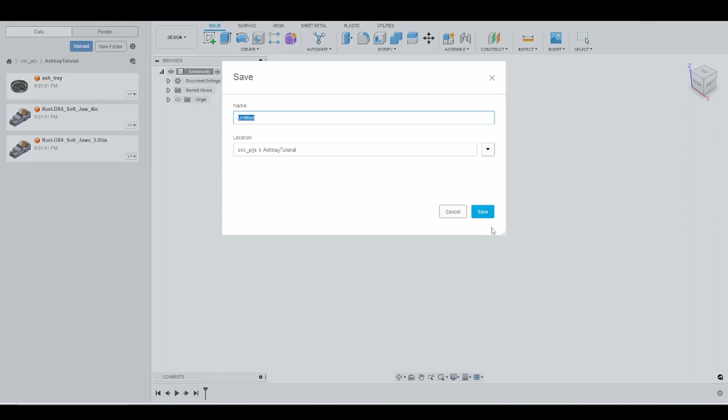Alright, the last step that we need to take before we get into the creation of the ashtray cam itself is go ahead and set up our assembly. So I'm here at a blank sketch. I'm going to Control S for save, and then we are going to save our assembly.

The next thing that I'm going to do is go ahead and drag in the soft jaw model that is set up for the 4-inch round stock. And we will just hit enter or press OK.

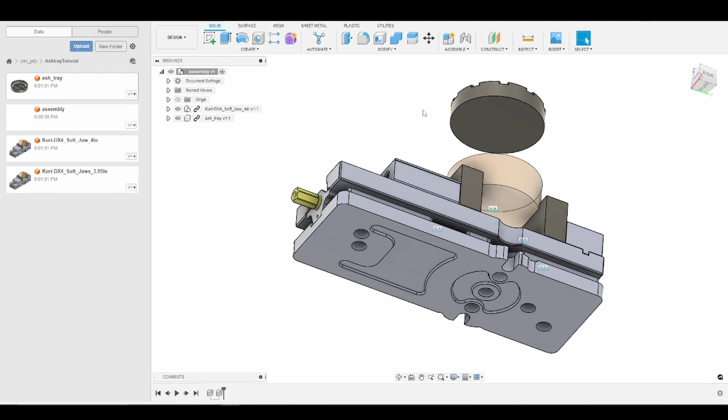The next thing I'm going to do is go ahead and drag in the ashtray. We're going to move the ashtray above our round stock, press enter, and then we're going to orbit so we can find the back of the ashtray. We're going to press J for joint, click the center of the back of the ashtray, and we are going to join it to our round stock in the center.

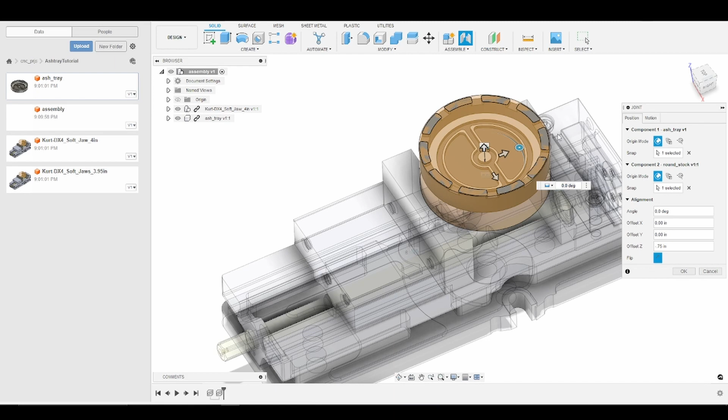Now we know our ashtray is 750 thousandths. So what we're going to do is start with minus 0.75 to go down in Z, 750 thousandths, that's the height of the ashtray. Now my round stock is rather rough, so I'm actually going to go below the surface of my round stock by 100 thousandths. So we'll bring it down there. Okay, so now I'm going to press OK, and now we have the ashtray inside of our stock.

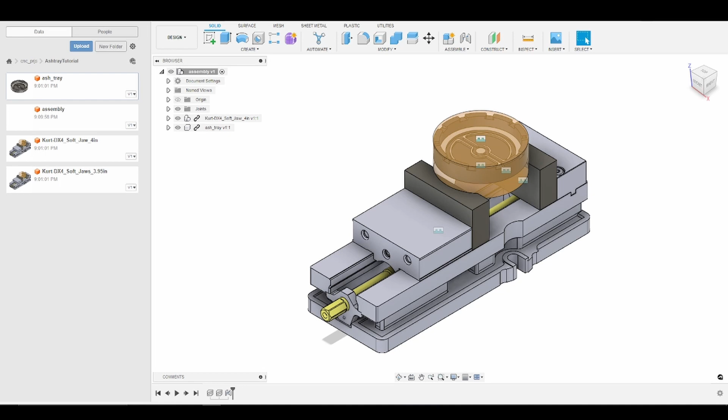The next thing we want to do is bring in our second vise and then join it just to the model. So what I'm going to do is hide our first vise setup, and I'm going to drag in the next vise setup.

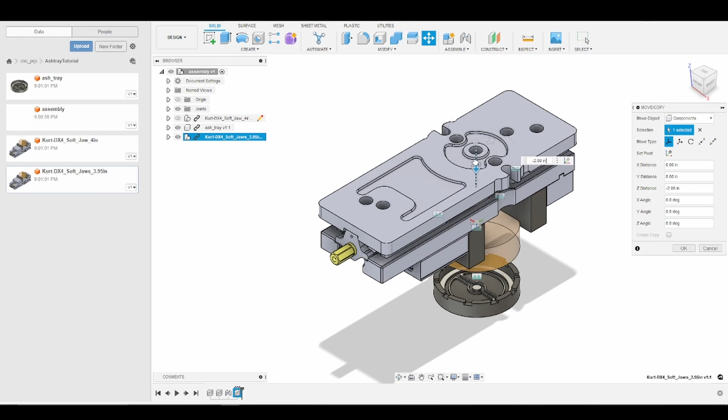We're going to move it up, and then we're going to rotate it 180 degrees. Now you notice I didn't bring it far enough up, so we'll go ahead and raise it some more. That's good enough. We'll hit enter, and then we will go ahead and hide the round stock.

Alright, so now what we want to do is join the ashtray to our soft jaws. You'll notice that it's kind of hard to do, right? There is no surface on top of the ashtray that gives us a nice point to joint.

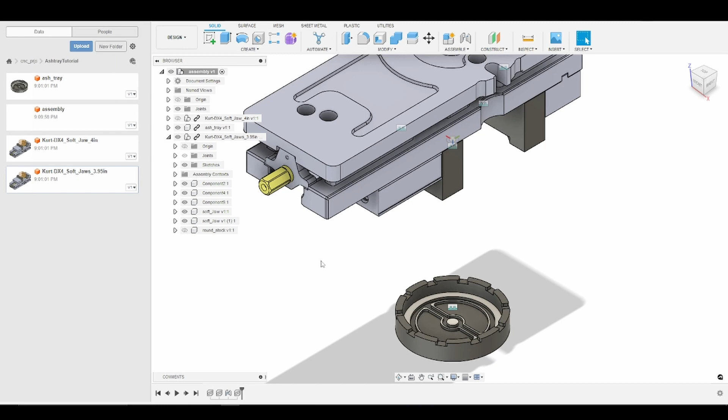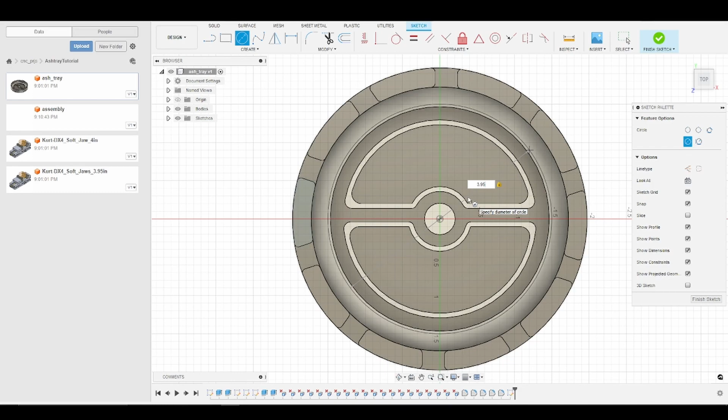So what we're going to do is go ahead and open up the ashtray model, and then we're going to create a new sketch, and we're going to click the top surface, and we're going to press C for circle, click the center, and we know that the diameter of our ashtray is 3.95 inches. Hit enter, and now we have a nice sketch that is on top of the ashtray. So I'll go ahead and finish this.

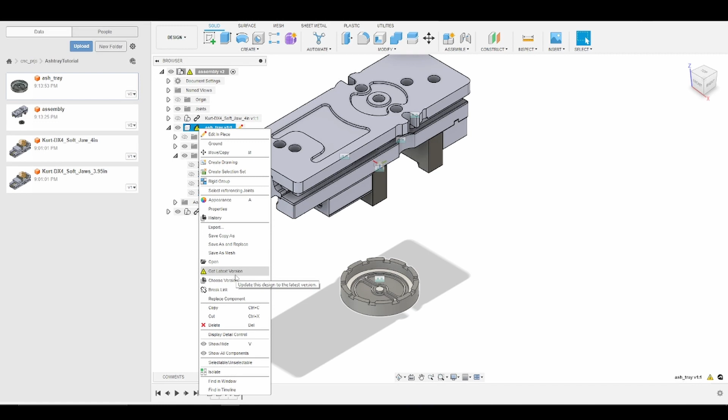We'll go back to our assembly, and we should be able to update our ashtray. Let me go ahead and save this. Alright, so you can see here we have a little warning saying that our model needs updated, so we will get the latest. And now you see we have that nice sketch on top.

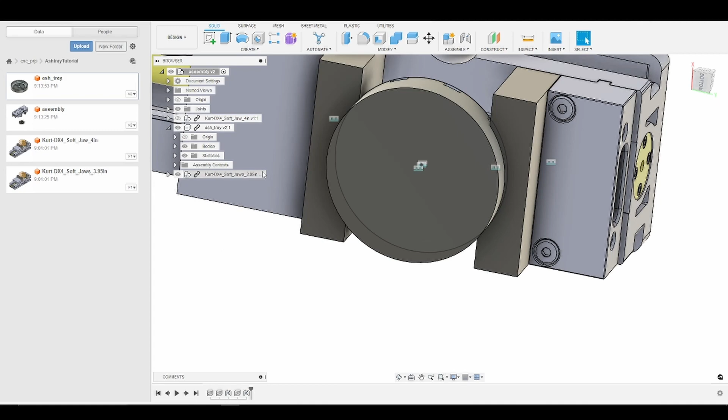So this time we will press J for joint again, click the center of that sketch, and then all we need to do is click on our joint origin. Press enter. And now what we'll do is we'll go back to the home view for a second.

And we will go ahead and make our other vise setup visible. And now you have it. We have both of our vises set up for cam.

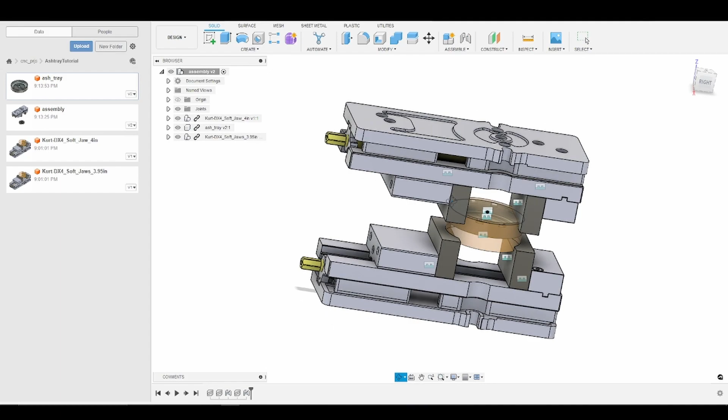I'll orbit around so we can get a better look. This is just, in my opinion, the better method, or my personal preference when it comes to setting up CAM. I like having both vises ready, and then I can do all the operations or all the setups at one time. We'll now go to the manufacturing workspace and begin our CAM.

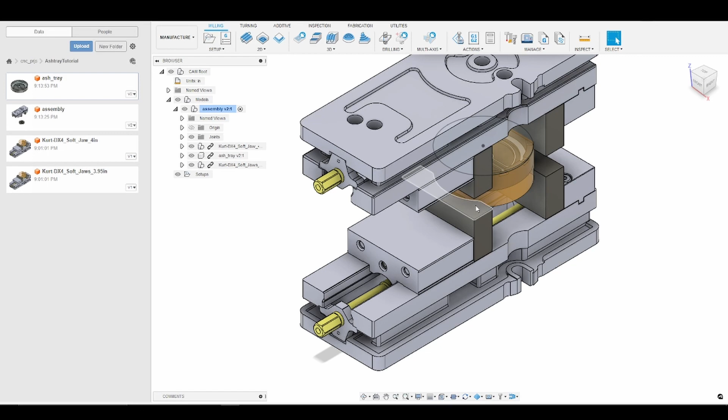The first thing I'm going to do is go ahead and make our second fixture invisible, and our first setup will be with our first fixture, which is the vise with the soft jaws to hold the 4-inch stock.

Now right click setup, new setup. We want to go to the stock tab, and we want to choose from a solid, so from solid, and now we'll go ahead and expand our vise model and click our round stock. The next thing we want to do is choose our work origin, or in my case, where I'm going to probe with my Tormach passive probe.

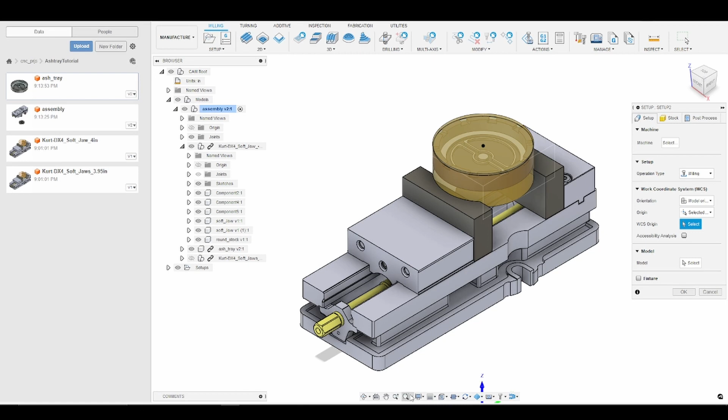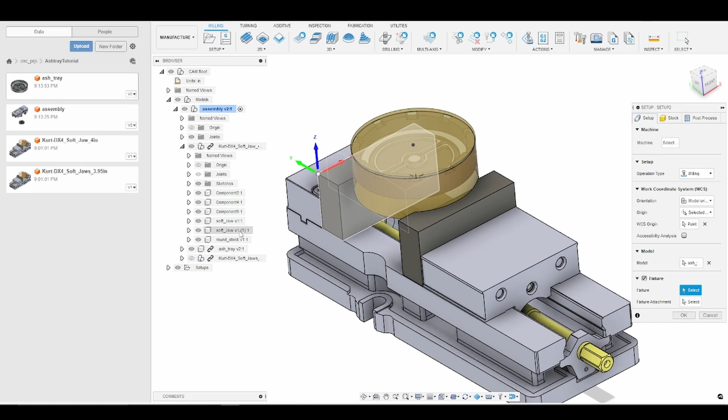I am going to go to a selected point, orbit, and select the back left corner of my soft jaw, always on the fixed jaw side of the vise. Then I'm going to select the model, which is the ashtray, and now I'm going to enable fixture, select the vise components, and click OK.

We'll go back to our home view, and so there is the setup for op1. Now we're going to have the exact same setup for op2, because I'm going to mill out all of the stock around the ashtray and then put the epoxy in.

So if I were to get any epoxy on the bottom surface on the inside of the ashtray, I'll be able to clean that up. So we're going to have our second op where we just go in and finish the inside of the ashtray. I'm just going to right click, go to duplicate, and now we have that set up.

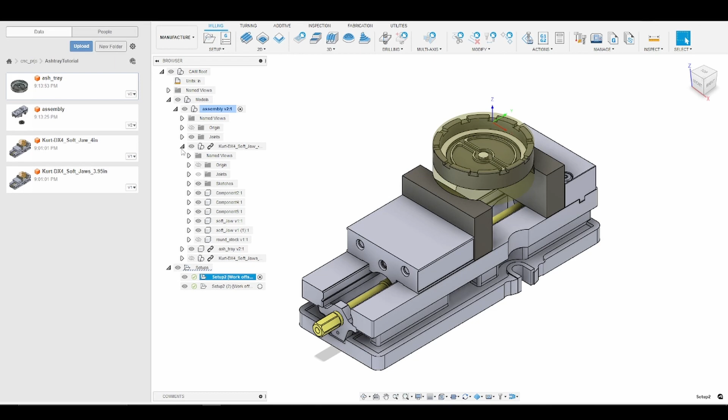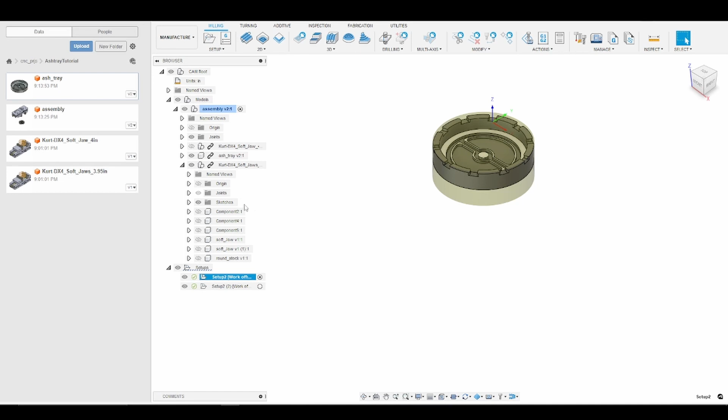Now you'll notice here, for some reason, the vise does not show up. If that happens, all that we need to do is make sure that the bodies of our second vise fixture are visible. To do that, we are just going to click on the eye symbol for all the parts of the vise, and now you'll see that our vise fixture is indeed visible.

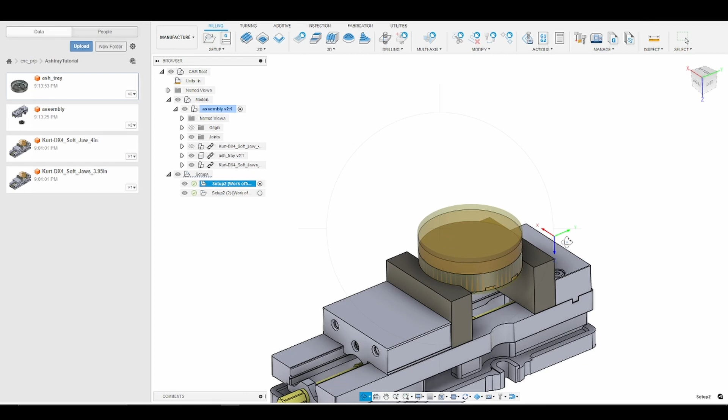So what I'm going to do is go ahead and orbit. There we go, that should work fine. Now I'm going to right click and say new setup. What I'm going to do now is go to stock from previous.

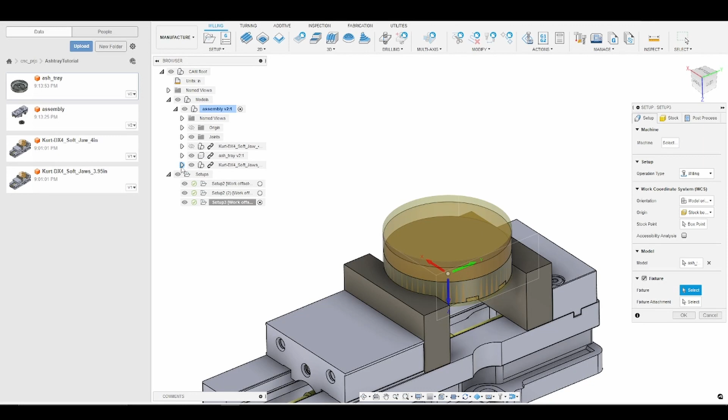That's fine, we'll go to our setup. We'll select our model, so the model is going to be the ashtray again. We will enable the fixture, and select all of our vise components, expanding and selecting everything except for the parametric stock. We do not want to select that.

Now what we want to do is again go to selected point for our work origin and select the back left corner of our soft jaw again. You'll notice that the coordinates are wrong, or the axis is wrong I should say. So we'll go ahead and click Z, that'll get us halfway there. We'll click X. So now X, Y, and Z are in the proper locations for the Tormach. Now we're good, we'll go ahead and click OK.

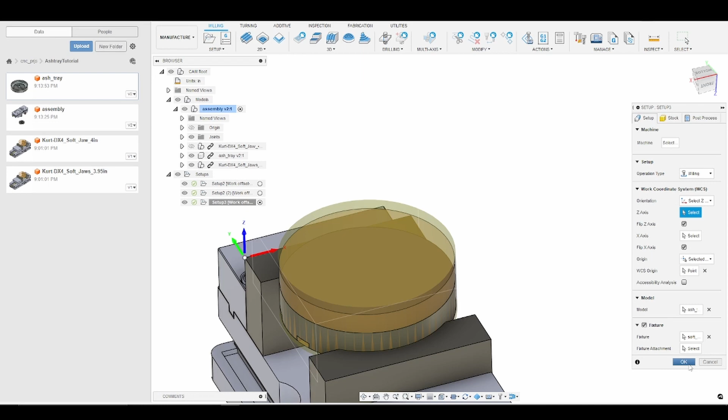And that does it for this video. So we've made our soft jaws, we've got our setups ready, and in the next series of videos, we'll go in depth to all of the CAM operations. Thanks for tuning in, and I'll see you again.